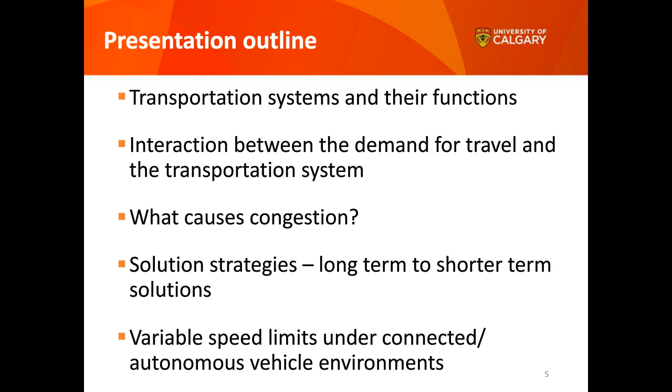Transportation systems are major components of our society and our economy. They are really the blood vessels for our community, taking us and moving us where we want to go, connecting us to our institutions, our families, and our lives. These systems consist of various subsystems that are interconnecting with each other, like the road network and how it interacts with the bike network, and with the transit network and the bus network.

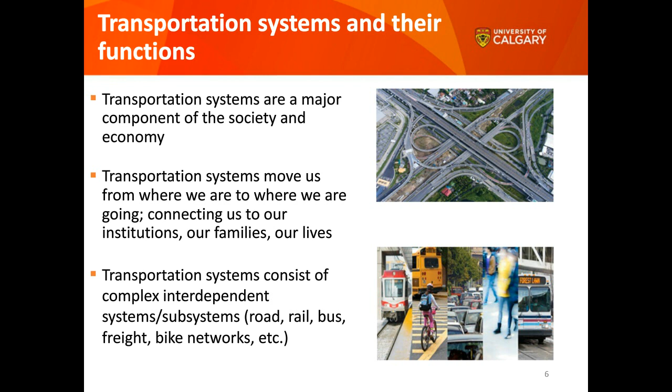Today, more than 54% of the world's population lives in cities. Canada's population is also largely urban, with more than 80% of Canadians living in cities. And these numbers are only expected to increase. With increased urbanization, we will have more congestion as a result of increased pressure on our transportation system. So we are going to have more challenges to face in order to provide safe and efficient access to goods, services, and opportunities. And this is one of the ways research is so important, right? These are finding practical solutions to our emerging problems. I will first start by explaining how and why congestion forms.

Congestion is the result of how the travel demand interacts with the transportation supply. So we travel to accomplish an activity at a destination, either going to work or to school or to meet a friend over coffee or to go to a medical appointment. These movements that we see as flows moving on the network are also shaped by our choice on where to live, where is our work or school, what transportation mode we're choosing. Are we biking? Are we walking? And what is the departure time of our trip? How many cars we have? Our habits, and also the household characteristics, like how many people live in the house, how many kids, their age group, the activities that they need to go to or we need to drive them to.

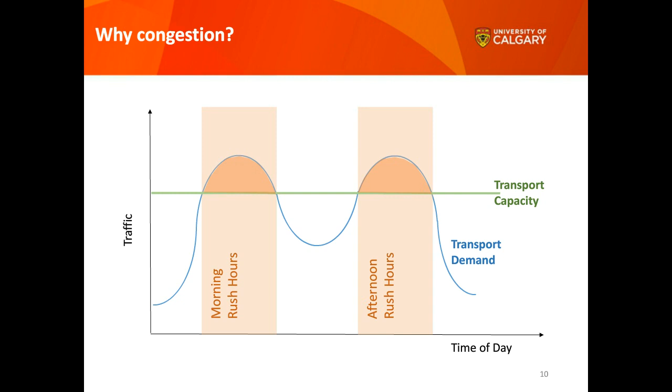The first idea that comes to mind: let's build more roads. Well, building more roads is not going to solve the congestion problem, and it's not a suitable long-term solution. If a new road makes driving to work quicker, you may benefit from that, but this reduced travel time will be attractive enough to convince maybe 2 people living in your street to abandon the bus and start driving, and maybe 2 more people in the next street to drive to meet over coffee, and so on. And very quickly, the drive to work will take just as long as it ever did.

Yeah, you don't think about those unexpected consequences from opening up a new artery. You're thinking, hey, this is great, more room, but you're right. Yeah. Now somebody taking the bus is like, I should be in that open lane. Yeah, exactly.

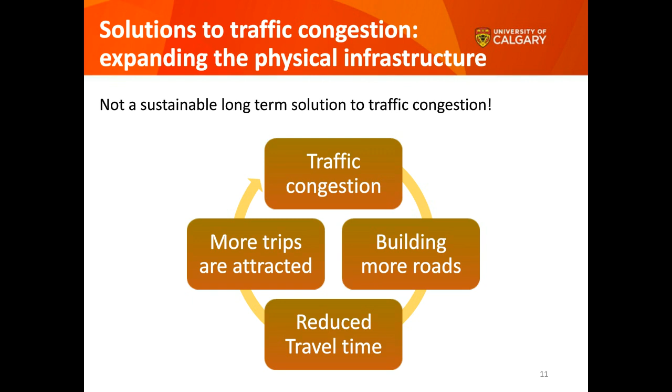Now I'm going to talk about some long and short-term solutions. And can you give me an idea, Lena, when you mean long and short-term solutions, the timelines on those? So a long-term solution will take years, like 10 or 20 years even, to be accomplished. However, short-term solutions are quick solutions that can take just days or weeks. So even maybe this afternoon I might be able to employ some of your ideas. Let's see.

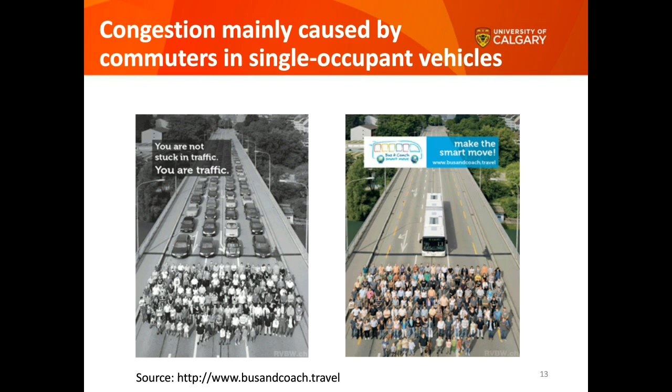The long-term solution is to provide more transportation choices that are attractive enough to be able to compete with the car. This can be achieved by investing in infrastructure that supports sustainable modes of travel, such as transit, pedestrian, and biking. However, to have a good transit service that is frequent and reliable, we need large demand to justify it. And this demand should exist during all times of the day.

The significant demand can only be generated when we have high density and diverse communities. To explain more the concept of diverse communities: to support travel by foot and by bike, which is usually slower than other modes, we need to bring the origin of the trip, which is usually home, closer to the destination, which is usually work, school, grocery store, coffee shops, clinics, etc. So we need developments with diverse land use types, and also diverse in terms of people, the age groups of people who live in these neighborhoods, because seniors and students usually rely heavily on transit.

In such communities, you do not need to use the car every day. People might decide to own only one car, and use the car during weekends, vacation, or only for certain types of trips.

It seems to be quite a North American phenomenon, though, because we go further and further out all the time instead of coming in. And I see now when you explain it here, of course, we can't support the transit system to go to the farthest outreaches to get 2 people. Right. So it really is changing our thinking around how we build our cities. Yeah, exactly.

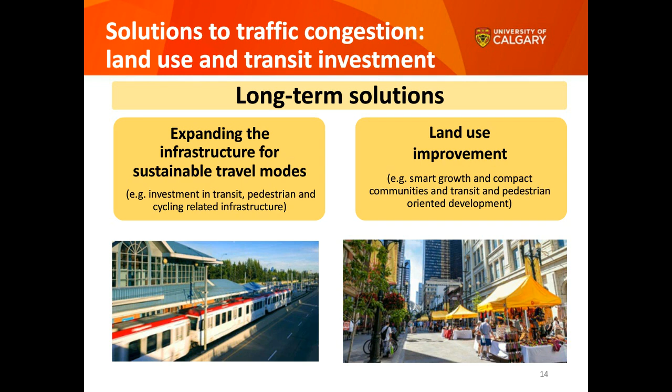This is still not enough. So you recall the slide that explains the congestion being the result of how the demand for travel is interacting with the network supply and capacity. So sort of that teeter-totter. Yeah. So we need also to look at the demand and how to shape it.

Demand management strategies focus on changing our travel behavior through incentives and disincentives. So again, if you go back to that two peaks and rush hour figure, congestion is mainly caused by commuters traveling in single occupant vehicles during peak hour. So demand management focuses on shaving these peaks by changing our travel behavior and influencing it to take other modes or other routes, or even decide to travel outside the peak hours.

As examples of disincentives, we have congestion pricing such as tolling, or parking management, like paid parking meters with limited time in downtown areas, or parking prohibitions even. So it's like penalties for some things and bonuses or benefits for others. And that's the best way to change habits? Yeah, exactly. So you give people rewards in order to encourage the good behavior, and penalties to discourage the bad behavior. So like that user pay system kind of a thing.

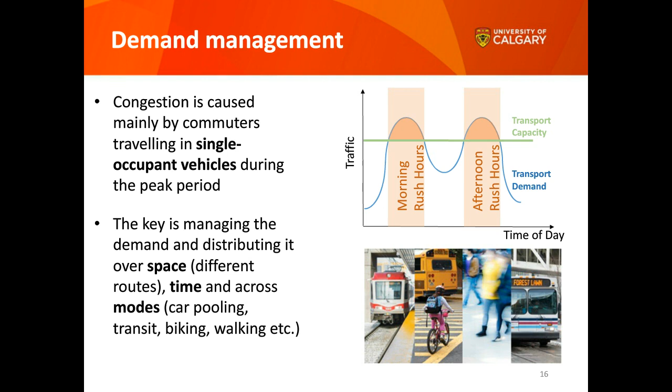The other short-term solutions can be achieved through traffic operation, which focus mainly on maximizing the efficiency of the network. As part of this, I'm going to mainly focus on intelligent transportation systems, such as smart traffic lights that can sense vehicles on the different approaches and provide more greens in the busy approaches, or signals that can grant priority when the transit vehicle comes to the intersection, or real-time information on train or bus arrivals through smartphone apps.

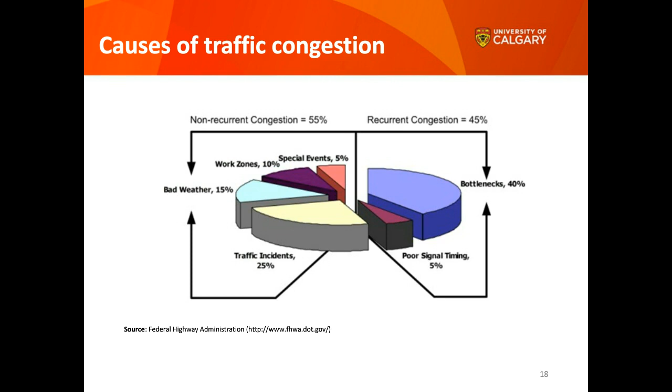So right now, Lina, in a lot of cities, are the lights not timed according to the time of day? And what you're suggesting is it wouldn't just be timed by time of day, it would be always. The system could see what's happening and respond. Yeah, exactly. So this is why we need lots of sensors and communication systems in order to implement ITS. At one time it was road sensors, but now we're moving toward the future and your actual vehicle. Yeah, we're going to touch on that too.

Okay. So ITS offers more efficient use of existing capacities through harnessing information and communication technology. So it needs comprehensive sensing and communication systems. Also, it needs intelligent control, able to gather real-time data and analyze it on the fly, and automatically deploying the actions. So finding solutions and automatically deploying them in the system.

We can take an example, a major collision happening on the freeway. Sensors, or even cameras like the CCTV cameras that we see throughout the city of Calgary, can have some additional intelligence to automatically detect incidents, and they can confirm the collision location and intensity. And then the traffic management center can provide information, which is what you're doing today, through FM radio and variable speed signs, advising commuters to use alternate routes.

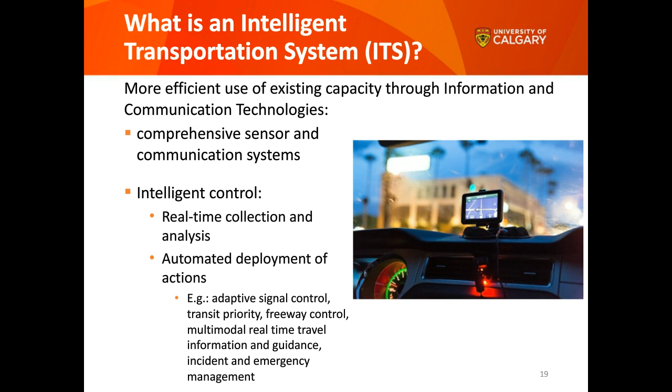So you knew that this is coming. Autonomous and connected vehicles are also part of intelligent transportation systems. The difference between autonomous vehicles and connected vehicles is, when we say autonomous vehicles, usually it comes at various levels of automation, with level 5 being the driverless car. So sometimes cars don't even have a steering wheel. And the real driver behind these technologies is to achieve greater road safety by removing human error and relying on advanced information, communication and sensing capabilities.

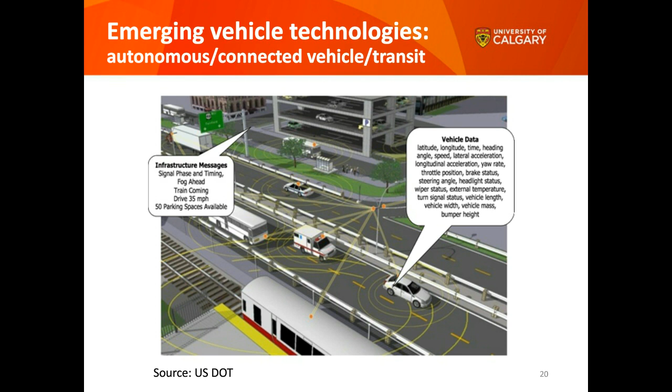To explain the concept of how congestion forms, we're now going to see a video with a very simple concept using an equal amount of rice passing through a funnel. You're going to see what will happen when everyone tries to get on the road at the same time and when we take a controlled and paced approach.

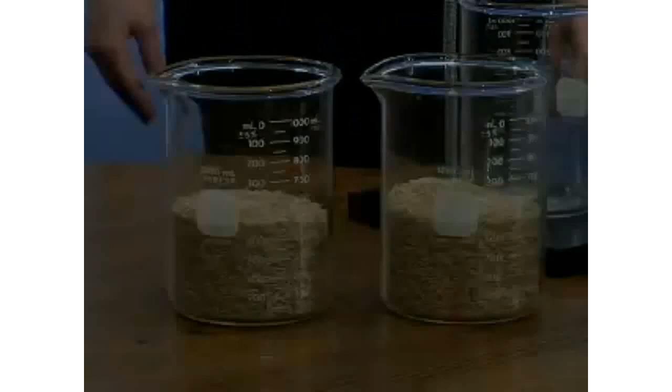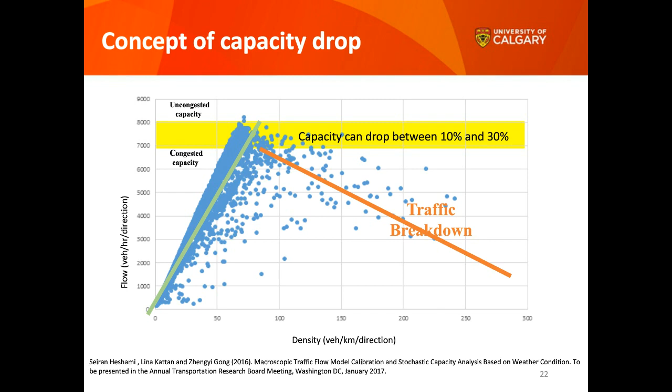Now I'm going to talk about how individual driver behavior also affects the traffic flow. I'm sure you've all been there. Sometimes when you're driving, you see the other lane driving faster, and we want to change lanes to get there faster to catch our appointment. We want to look at this in two different ways, and we're going to see how one decision will impact everyone on the road. As I start this video, I want you to keep your eye on the red truck in the bottom right, and when the driver decides to change lanes, how it will affect all the other drivers behind. We call this a phantom jam.

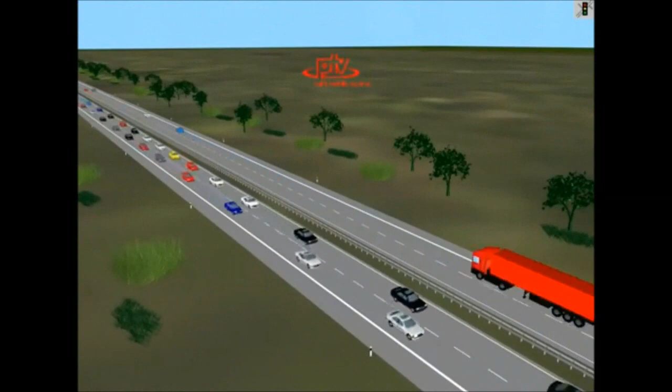So we're looking for that red vehicle, Lina? Yeah, red truck. And he's just passing that guy. So you see how this lane is becoming congested? Oh, yeah. And why did they almost stop there? Because each car is decelerating, and then the car behind has to decelerate, and then it will come to a stop and go, and it will have a ripple effect even kilometers upstream. Wow.

See, and I often do that. I have to admit, I'm a lane jumper. But I'm also the guy stuck in that jam sometimes. Yeah, you see the queue. And now the other lane is becoming faster, and maybe you will decide to change lanes, and you're going to make the other lane worse. Wow, okay. But now I'm going to explain it in another way. I think the other video might also be explaining it. So this is another video by Andrew Marr explaining the same phenomenon with computer graphics.

In busy traffic, it only takes one car to suddenly apply the brakes, making the car behind slow down further, and the next car back reduce its speed further. This behavior creates a ripple effect and will force vehicles kilometers away to slow down. The result is that several kilometers back, wow, cars will still come to a stop-and-go cycle, with drivers trying to figure out what's going on.

Right, because you get further ahead and you're expecting a crash or lights at the very least or something, only to find out there's nothing. Nothing. It's a phantom. Wow, okay, cool. So it's really very important to take into consideration human behavior and driving behavior when designing these systems, because even if you do design it perfectly, significant problems might occur if you don't take into consideration human behavior.

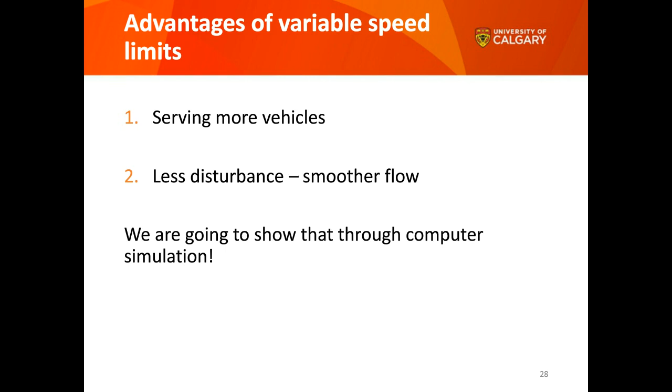So what are variable speed limits? Variable speed limits are speed limits that can change. They can change even every kilometer and even every minute. And they change when we have traffic congestion or bottlenecks, or when an incident happens, or when we have adverse weather conditions such as a snowstorm or heavy rain. And the advantages of variable speed limits are to serve more cars and to have less disturbance and smoother flow. We're going to show these advantages through computer simulation.

So that's what you use now, like you put data into a computer and get that idea of what the real thing would be? Yes. This is really a complicated process, but I'm going to walk you through it. In my lab, we rely heavily on microsimulation as our evaluation tool. And what are microsimulations? They create a virtual replica of the network that you need to examine. And the reason for using simulation is that often in transportation, we cannot test the solution on the real network, as we would be causing major disruptions. And in some instances, we don't even have the technology yet.

So we need to do everything in a virtual laboratory where we can safely conduct our experiments and test various solutions under various scenarios and conditions. The microsimulation models usually have lots of parameters that need to be adjusted based on data that we collect by observing traffic, such as the number of vehicles passing through a number of sections on the network, travel times and speed, queue formation, their length, and their location.

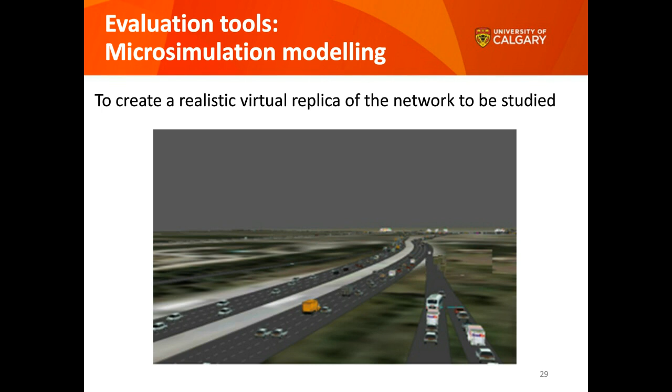What we're really doing is adjusting the model parameters to reflect more realistically how drivers in a given network behave. So the percentage of aggressive drivers, their different response time, their compliance with the speed limit on the road, and their choices of routes, and also calibrate the demand profile to have a number of vehicles in our simulation close to the real number of vehicles that you observe in the network.

Lina, do you use age and gender when you're looking at the characteristics of drivers at all? Age is reflected in the response time, but gender is not, no. Maybe the aggressivity is part of it. Yeah, I see that, the aggression behind the wheel, but that could go both ways too. Yeah, but in general, we have the same demand.

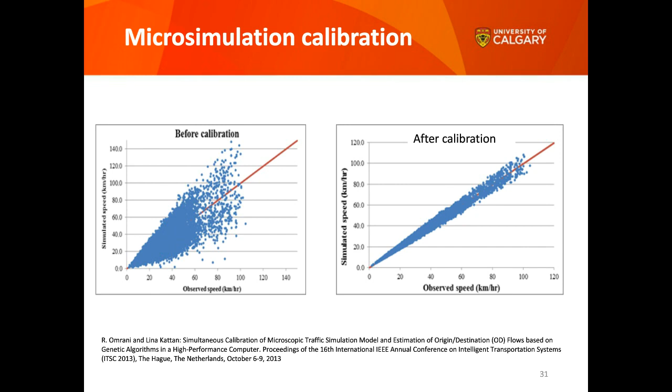So these figures compare the relationship between observed and simulated data before we do the calibration and after we do the calibration. So you see this red line. The closer the results are to the red line, the more closely we are replicating observed conditions. So that's how you know that your results are the best that they can be. Yeah, get close to that line. Yeah, this means that the computer model is becoming a more reliable tool to test our solution.

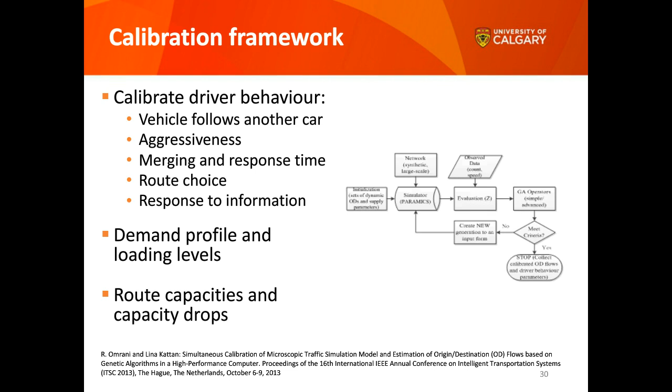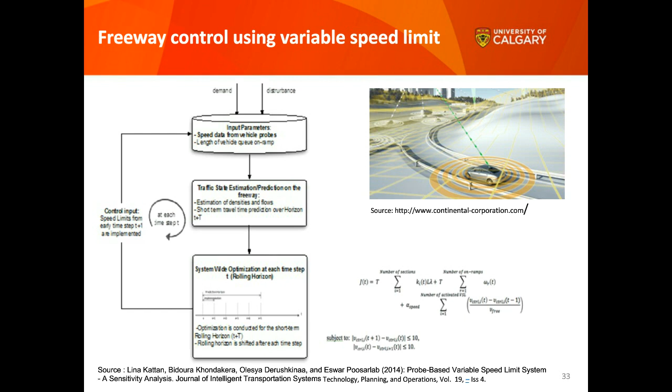Lina, we have a lot of people asking about how the results are affected when you have a mix of autonomous, conventional, and connected vehicles. Oh yeah, we're going to touch on that. So in the first exercise, we're assuming 35% of the vehicles are exchanging their speed information. Okay.

So these are the results that we have seen in terms of the number of vehicles that we can serve. Remember the accident is located close to Memorial Drive. The figure on the left side shows lots of red and dark green parts with the current fixed speed limit system, showing congestion formation, also propagating even further upstream. And only a limited number of vehicles can be served. Right, because you drop down to like 1,000, and at your peak you're at 4,000. That's a major change in how many vehicles are getting through.

So that's the rice flow again, right? Right, exactly. This is exactly the same idea as the rice video. When we pace the vehicles as in the rice figure, through variable speed limits, we can eliminate the queue formation and we can serve many more vehicles.

And it would be a dramatic change for us because we're so used to the limit being posted. How does that transition work when all of a sudden it's changing? So for sure, we need some time to get used to it. But clearly there's a good result. Yeah, a better result. But with autonomous and connected vehicles, that won't be that much of a problem because the vehicles will be receiving this information and the speed advice directly.

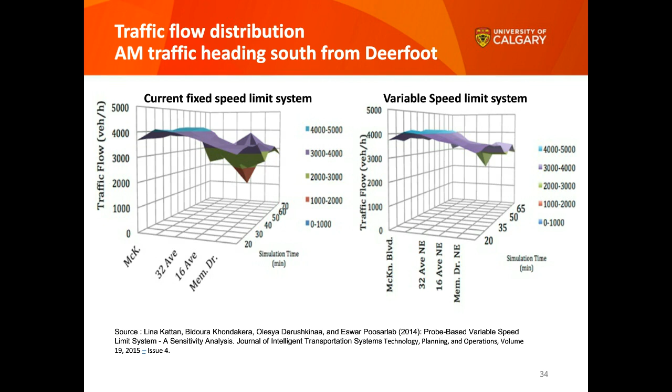In another research, we examined the impact of variable speed limits on also the lane changing and the acceleration, deceleration behavior. So in addition to vehicle speed, we use more detailed information related to vehicle positions, acceleration, deceleration, and lane changing behavior. We took this information and also predicted the behavior of the vehicles as part of the variable speed limit values that we are trying to optimize. And we tested this on a hypothetical freeway by also creating an incident that lasts for 1 hour.

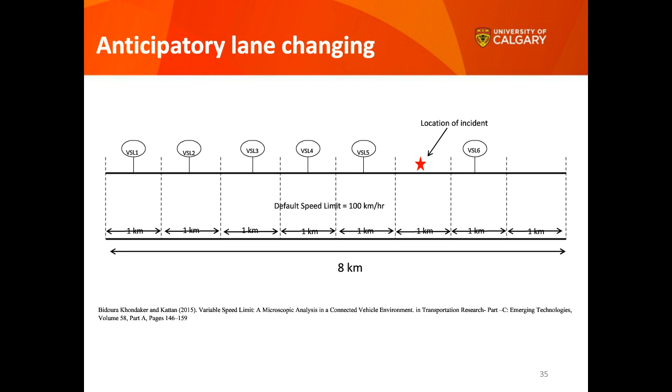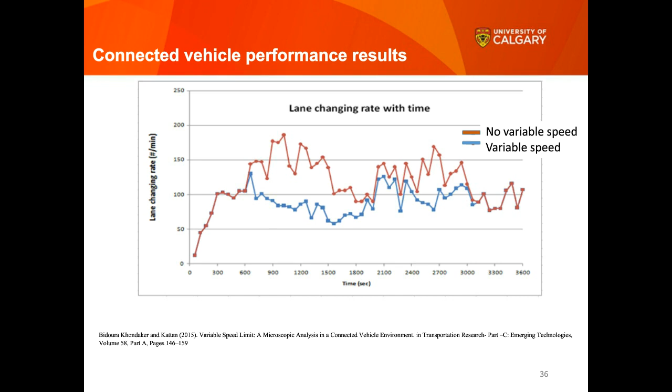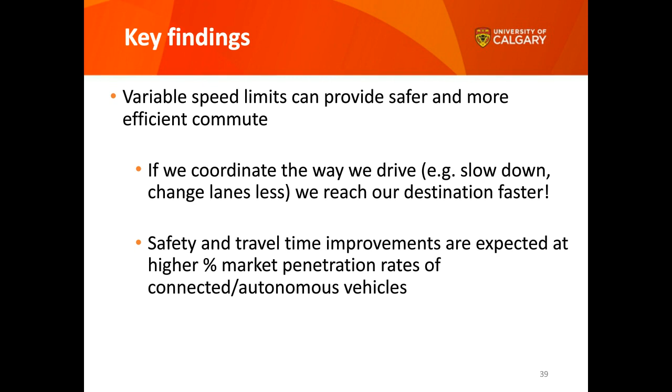So this research only looks at one aspect of a short-term solution. Lots of other short-term solutions can also be integrated with variable speed limits, but this is still not enough. We need to keep our eyes on longer-term solutions. With the expected increased urbanization, mass transit is the only way to move people efficiently in large cities. But this can only be successful by providing high density and diverse communities with more transportation choices.

Again, this is not enough. We still need to shape our behavior and our travel behavior, since demand is a very important part of the equation. Once we are on the road, we are all contributing to traffic and we are all congestion. So here's what we all need to do.

Municipalities and governments should consider implementing more demand management strategies such as tolling or carbon taxing for vehicles, parking management, carpooling and car sharing strategies, high occupancy vehicle lanes. And companies downtown can consider providing incentives by offering their employees transit passes instead of parking passes, and also offering the choice of working from home, maybe even twice a week, or having more flexible start and end times of work.

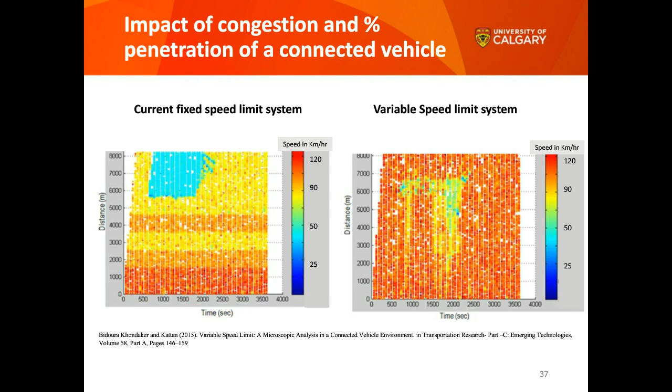So if we have bottlenecks, we will be lowering it gradually, so people don't have to come from 100 kilometers and then come to a stop. So we'll be lowering it on different sections from 100 to 90 to 80 to 70 and so on. And even if we have a snowstorm, we can reduce it. So it's going to change. The upper speed will change, will mainly be lowered. Oh, the upper speed will likely be lowered.